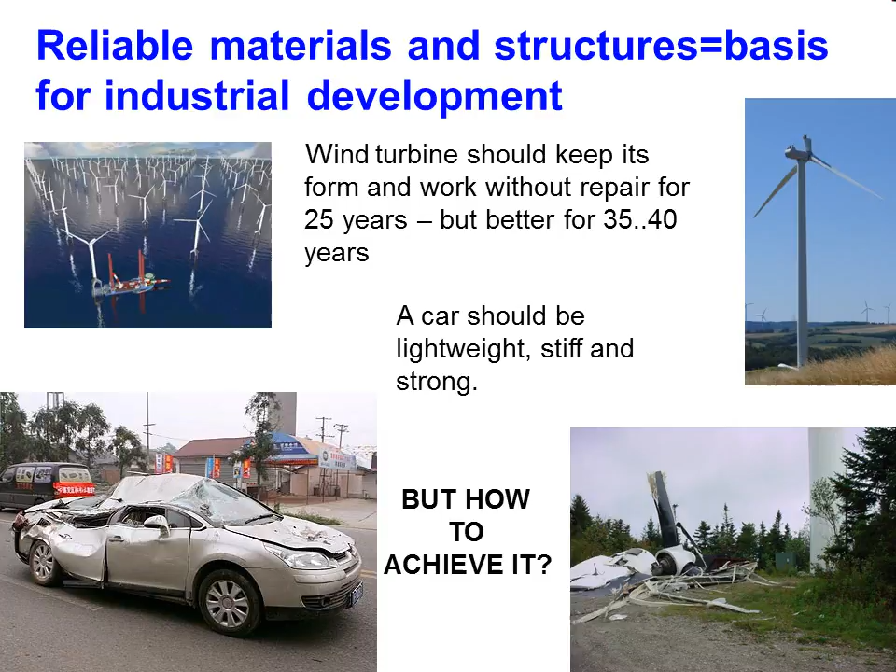Composites are on the market since the 1930s. Lord Kelvin once said that there will be no new discoveries in physics. It was 115 years ago. Are all the structural materials problems solved now? No more than problems of physics were at the time of Lord Kelvin.

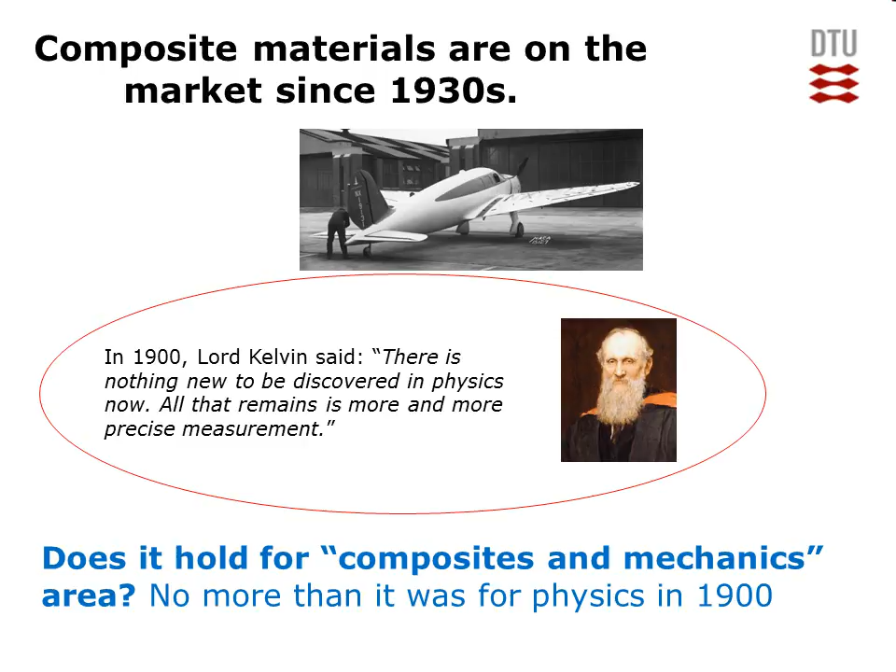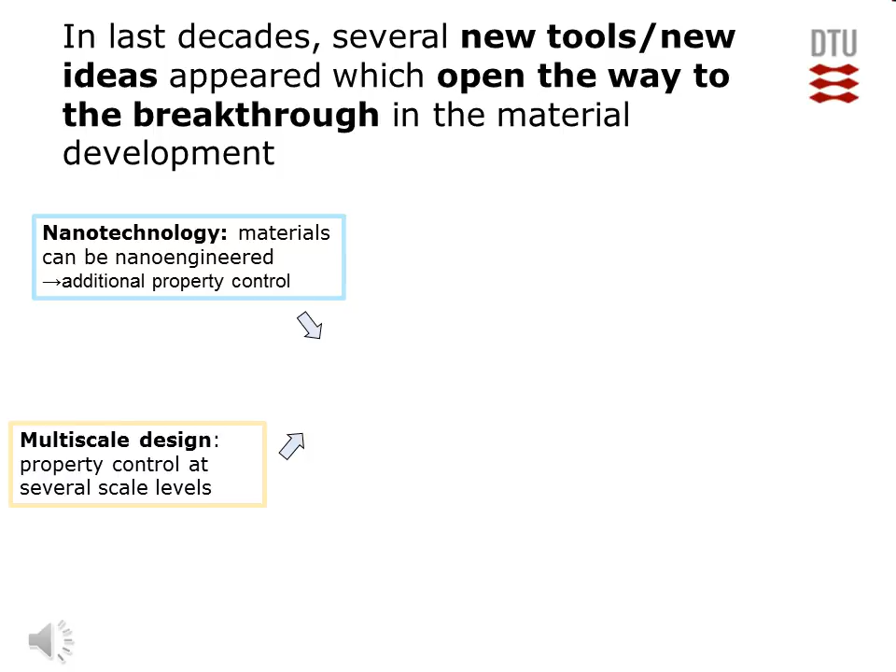Over recent years, new tools and ideas appeared, which opened the path to new generations of composites: nanotechnology, multi-scale design of materials, computational testing, biocomponents, multiphysics.

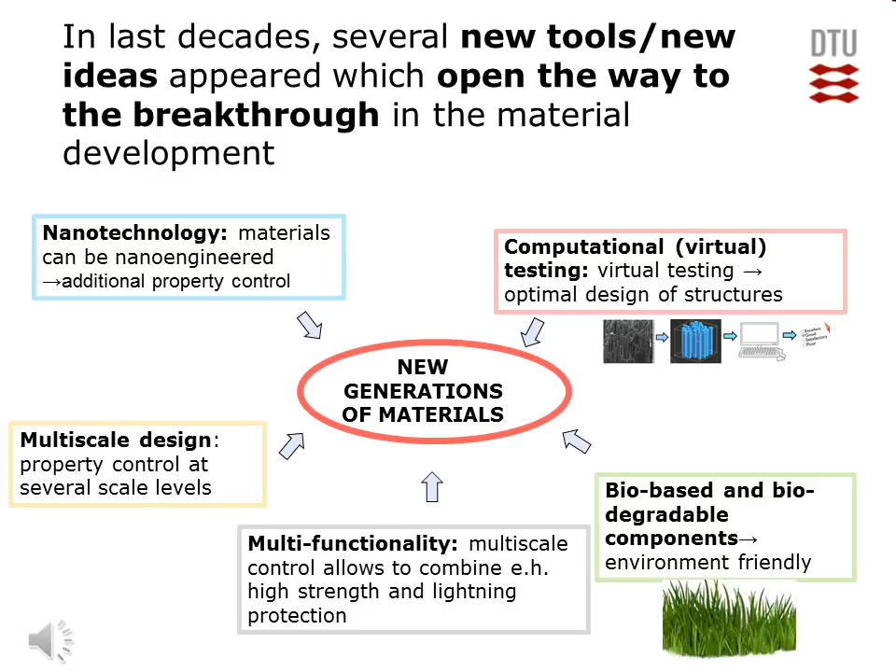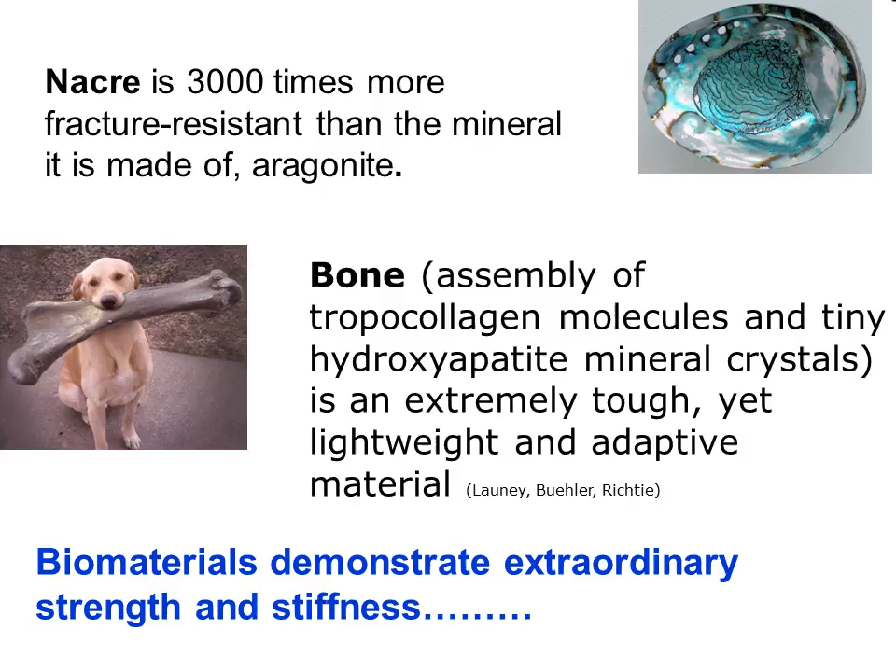Let us look around, at nature. Nacre is 3,000 times more tough than its constituent. Bones are tough, strong and light. Biomaterials have extraordinary properties.

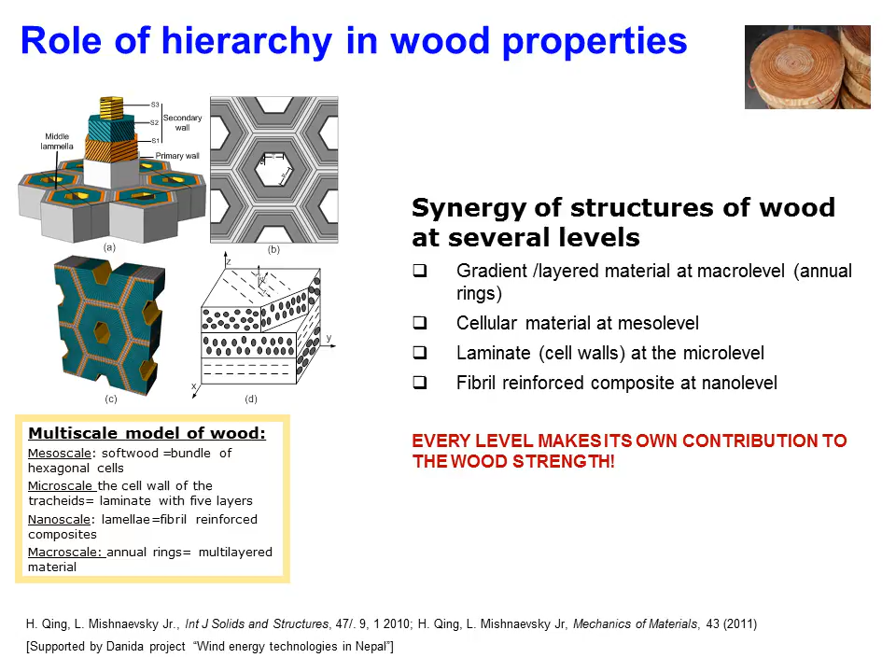Let us look more closely at the role of hierarchy in wood strength. Every scale level represents a composite, controlling different aspects of deformation and strength of wood. Can we transfer and exploit the idea of hierarchical materials in structural composites?

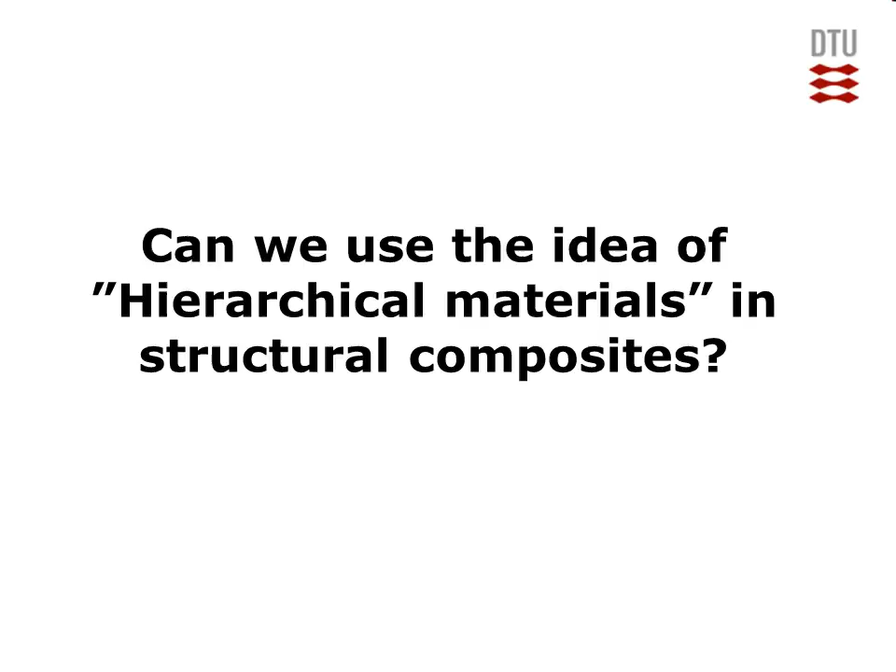Yes, we can. Adding nanoparticles into the composite enhances the fatigue resistance of the material, and adds additional functionalities, like sensing function.

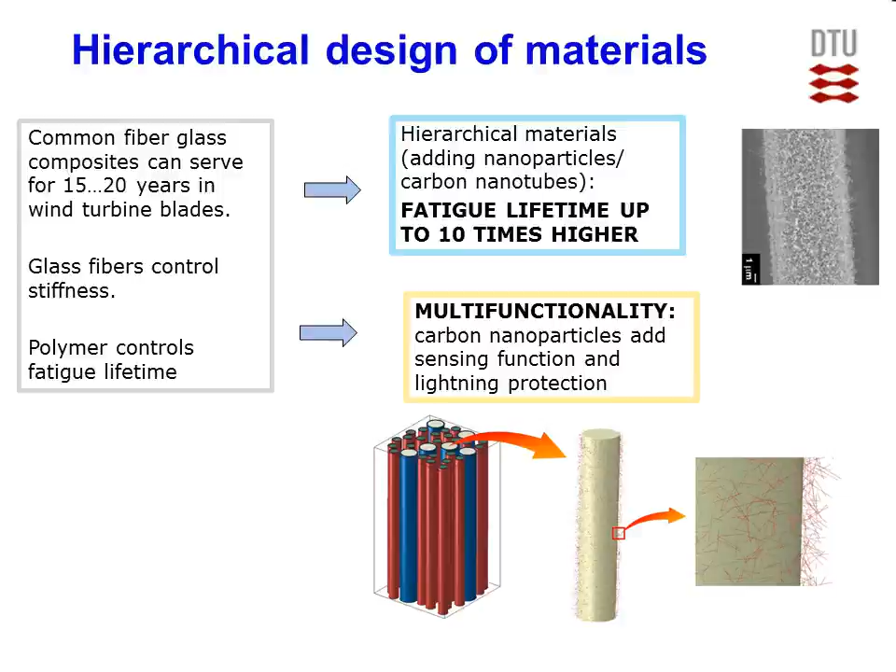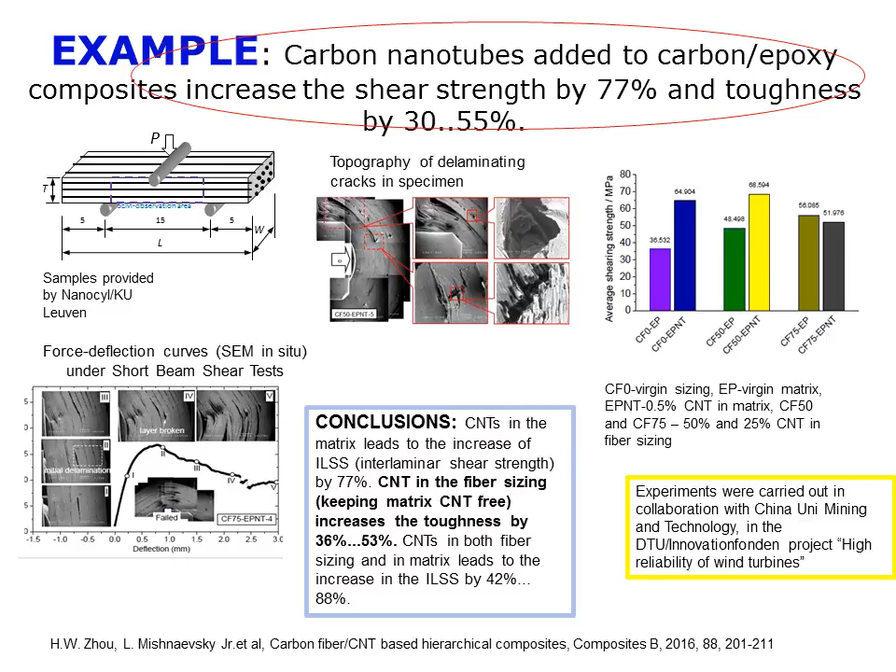For instance, we carried out experiments. Carbon nanotubes were introduced into carbon fiber epoxy laminates. We observed that the toughness increased by 50%. This work was carried out in the framework of a Danish-Chinese collaborative project.

Now, how can we choose optimal structures of materials? Can we design optimal materials?

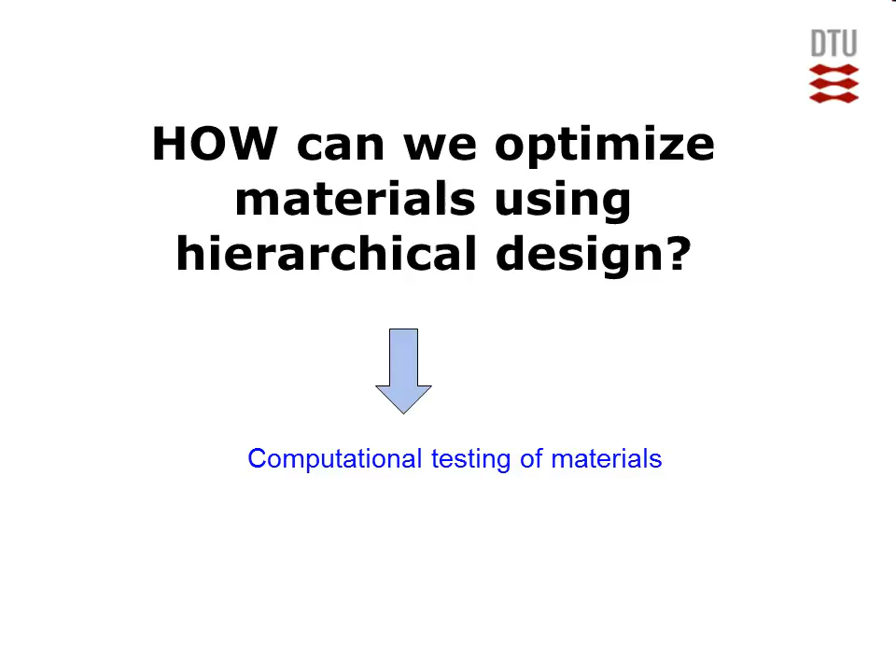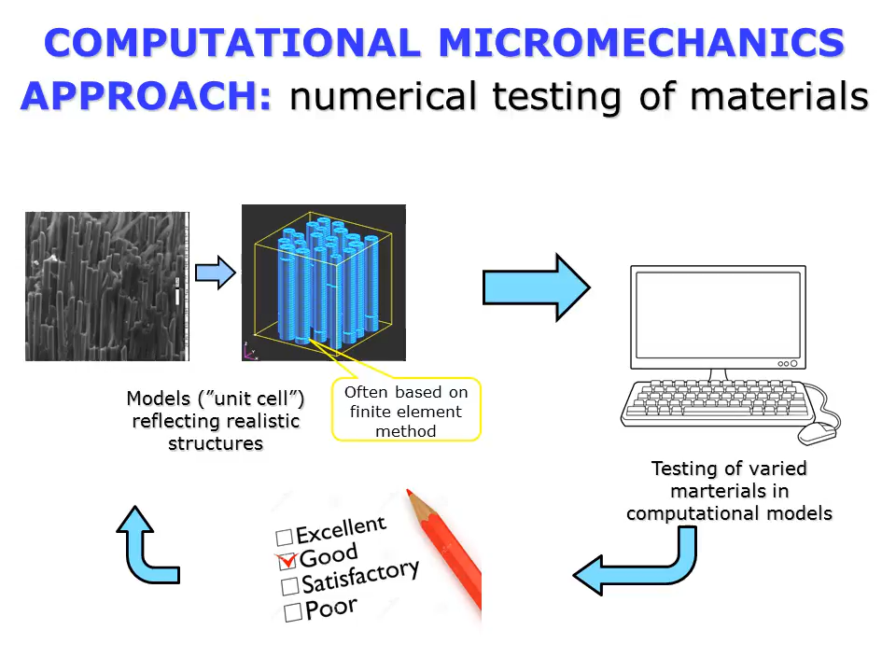We can use computational, virtual testing of materials. Taking into account real structures of the materials, one can generate computational models, using for instance finite elements, and test them in virtual experiments.

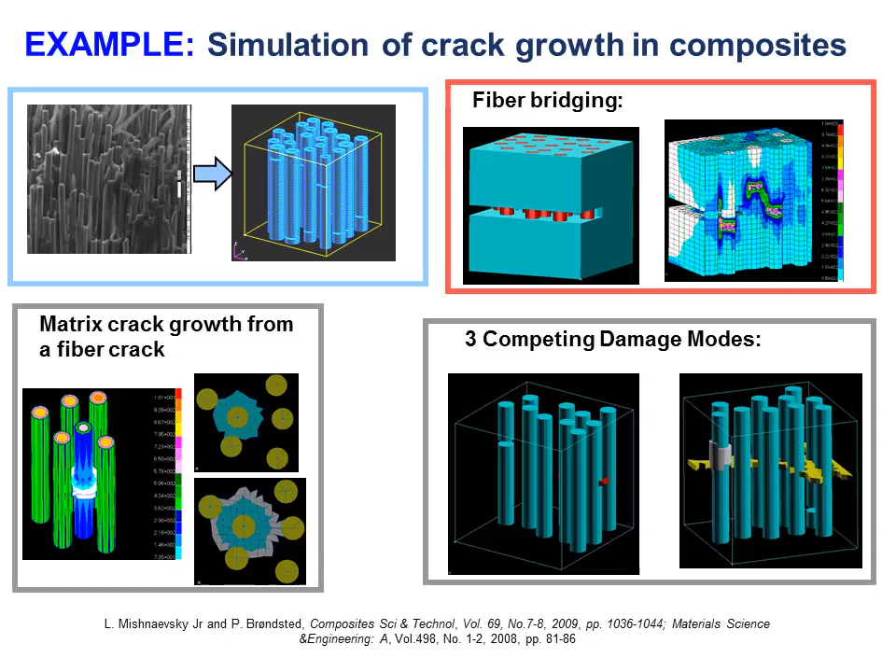Here is an example: crack growth around glass fibers in a composite, observed in the simulations. These rather simple simulations show the main features of computational testing of composites.

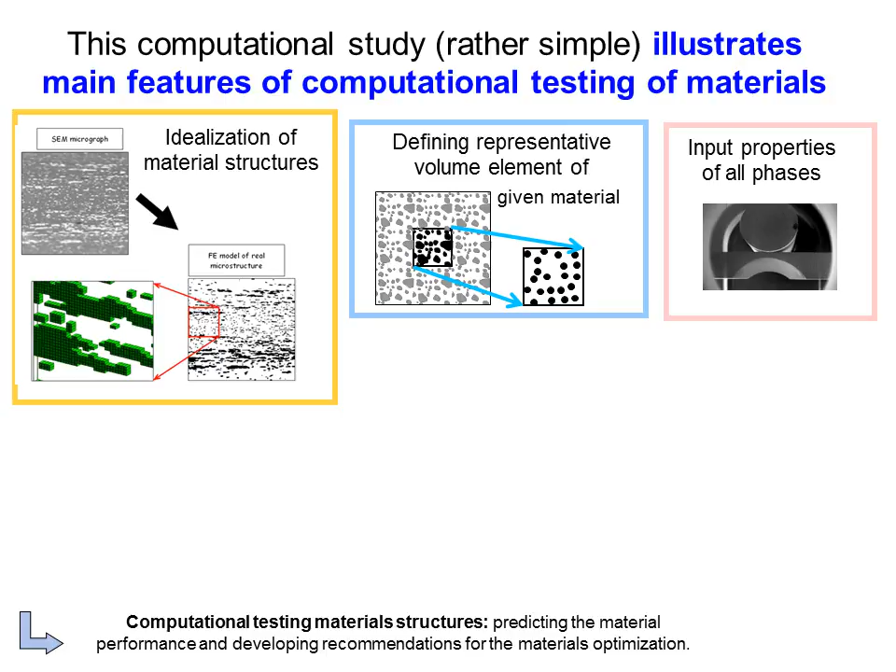It includes the analysis of typical structures, and determination of nanoscale properties, idealization and discretization of the material structures, defining the representative element of material, and dealing with nonlinear effects.

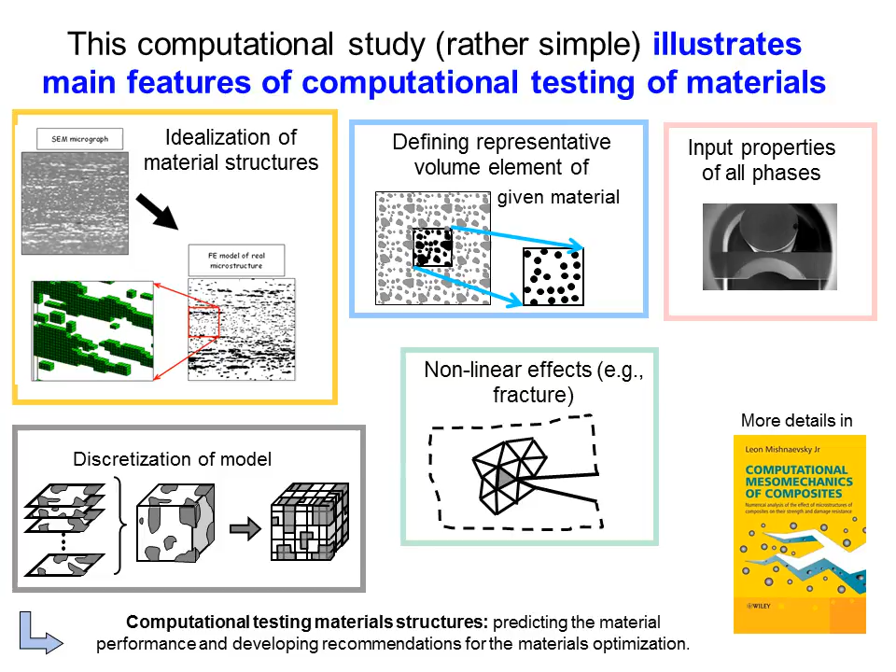Carrying out the computational testing of materials structures, one can predict the material's performance, and develop recommendations for the material's optimization.

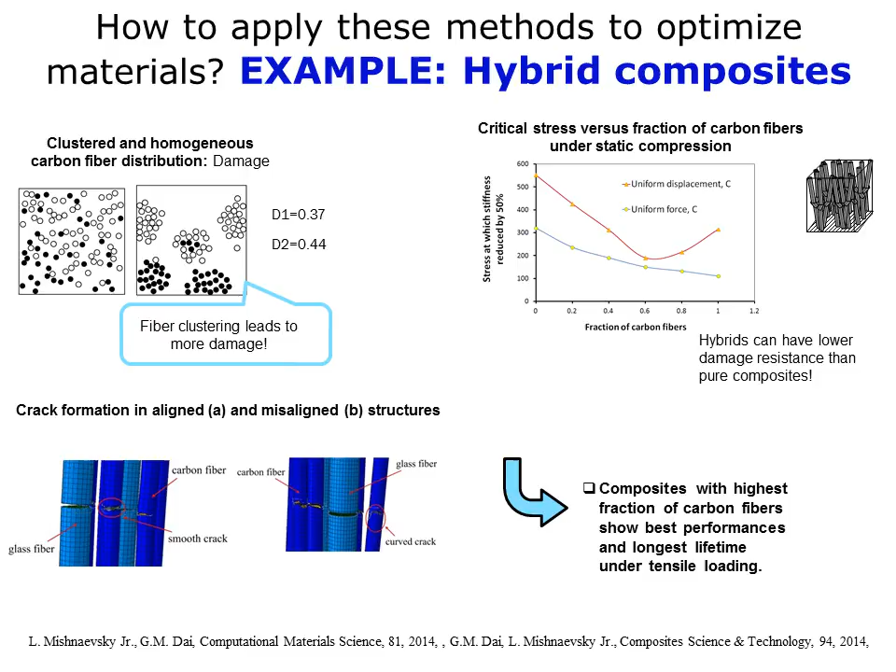These methods can be applied to the optimization of composite structures. For instance, hybrid composites with glass and carbon fibers ensure reduced weight and higher strength of wind blades. Our computational simulations allowed to predict the strength and lifetime of such composites?

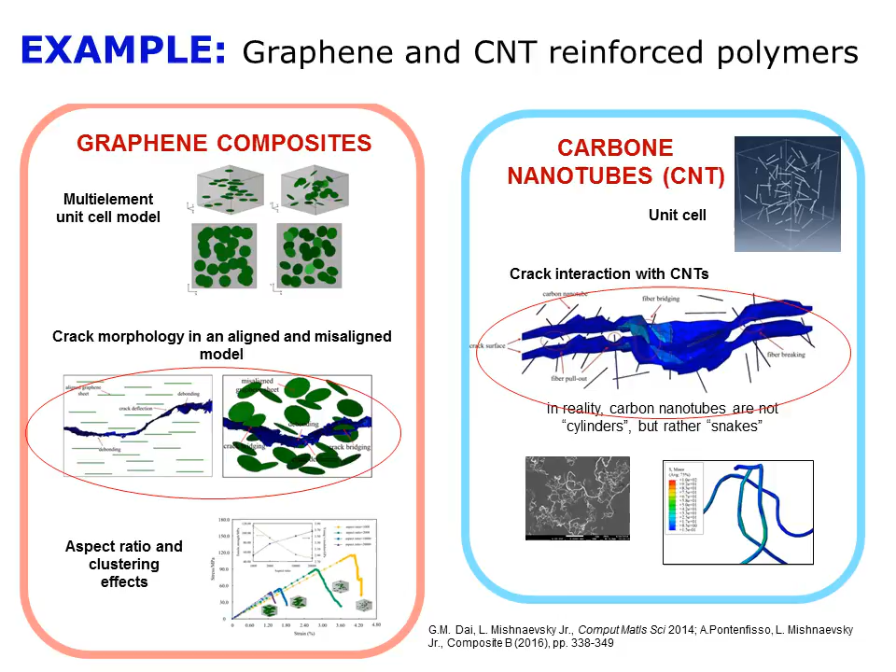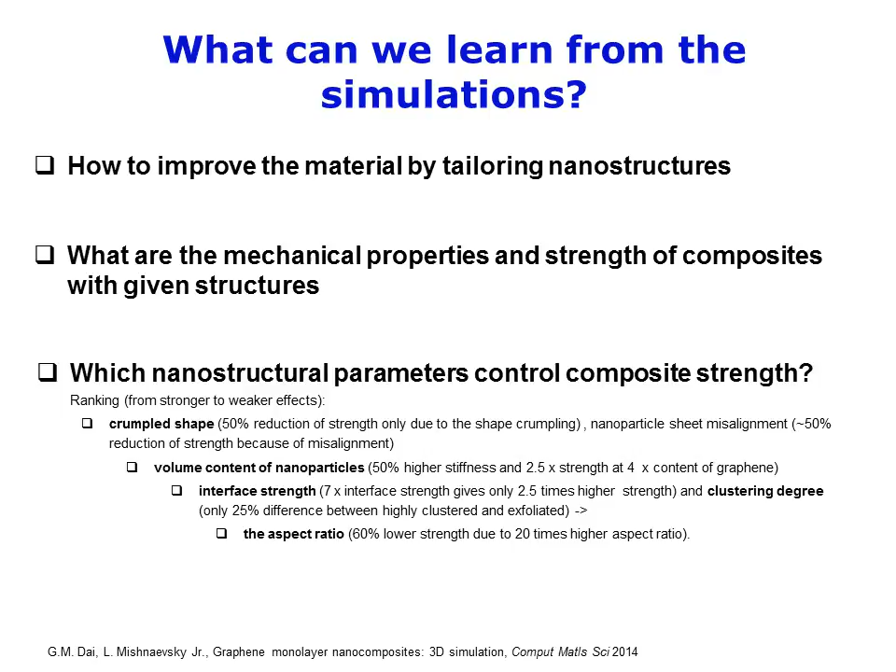What can we learn from such simulations? We can see how the material structure influences strength. We can predict performance of new materials, and find ways to optimize the materials.

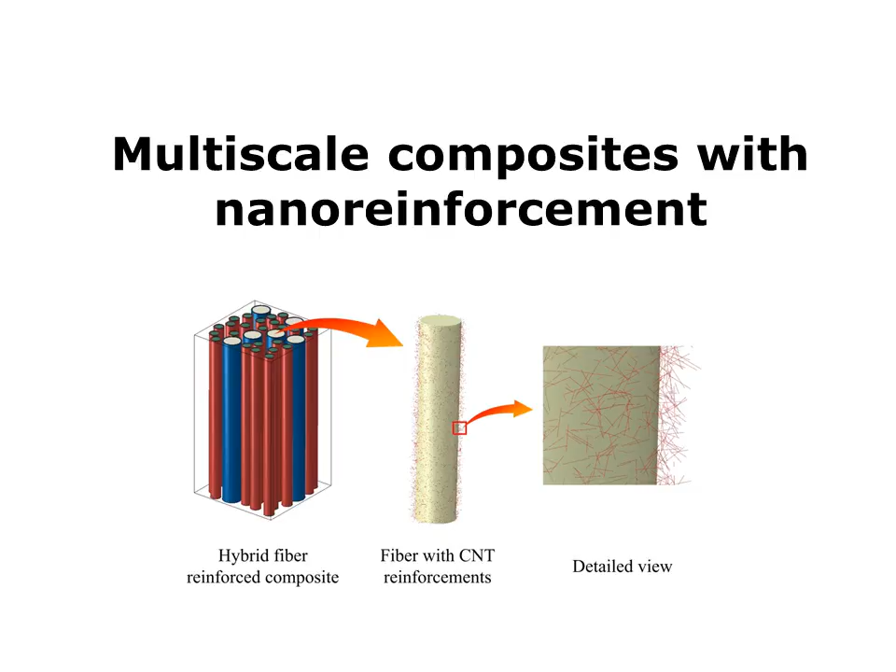For multi-scale composites, computational modeling and testing are much more challenging than they are for common materials.

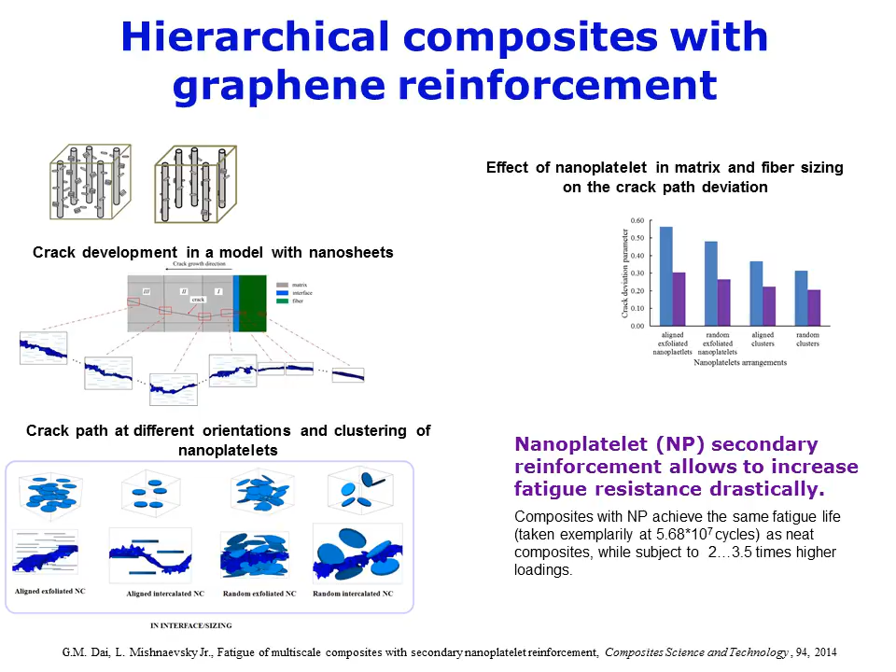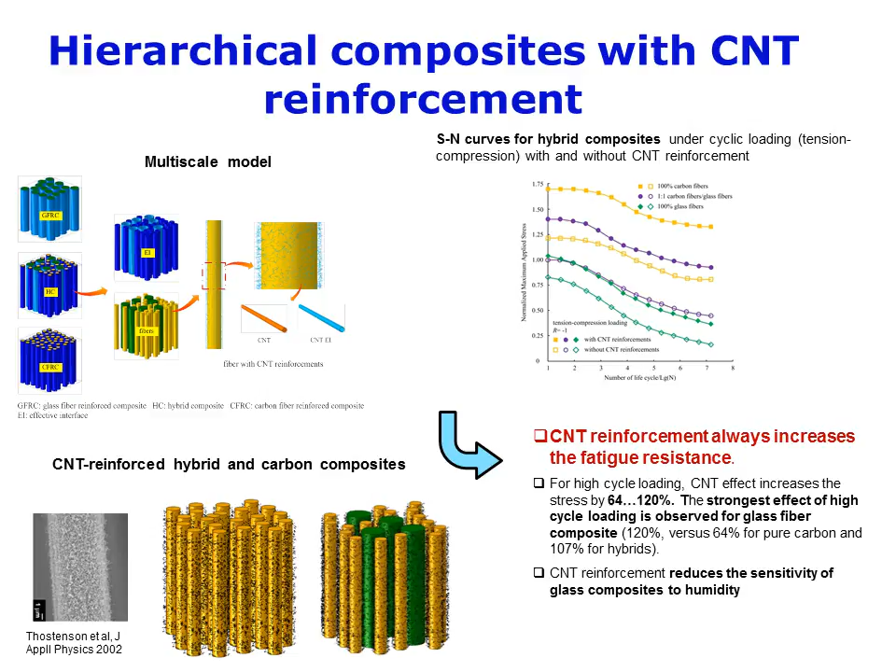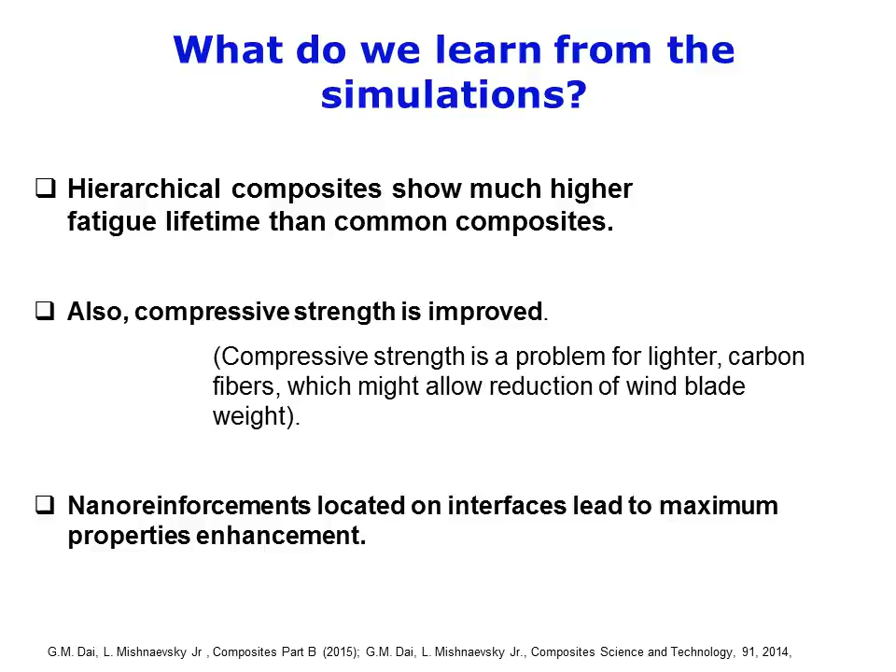Another important advantage of hierarchical composites is the multifunctionality option. Composites with introduced nanocarbon particles can be used as a sensor network, sending information about deformation and damage of materials to the user. The conductive embedded network can also be used to protect the material from icing and lightning.

Another promising direction is the development of nano-engineered coatings, for instance, for wind blade protection against leading-edge erosion.

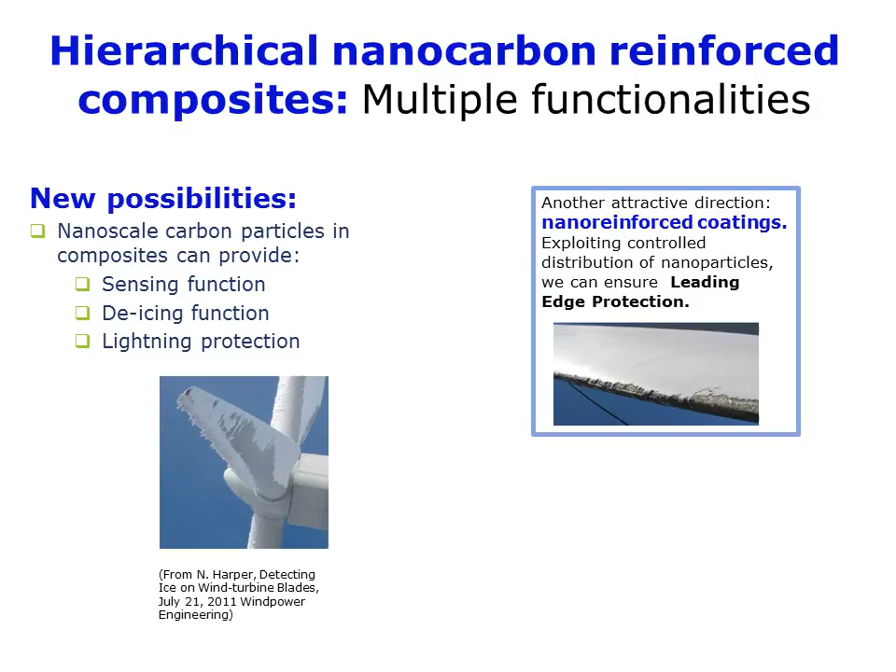But how far are hierarchical materials from practical applications? Not too far. First, natural materials. In our recent project, we demonstrated that wood, as a natural composite, can be used for small wind turbines. Our partners in Nepal built a number of such wind turbines, also in schools.

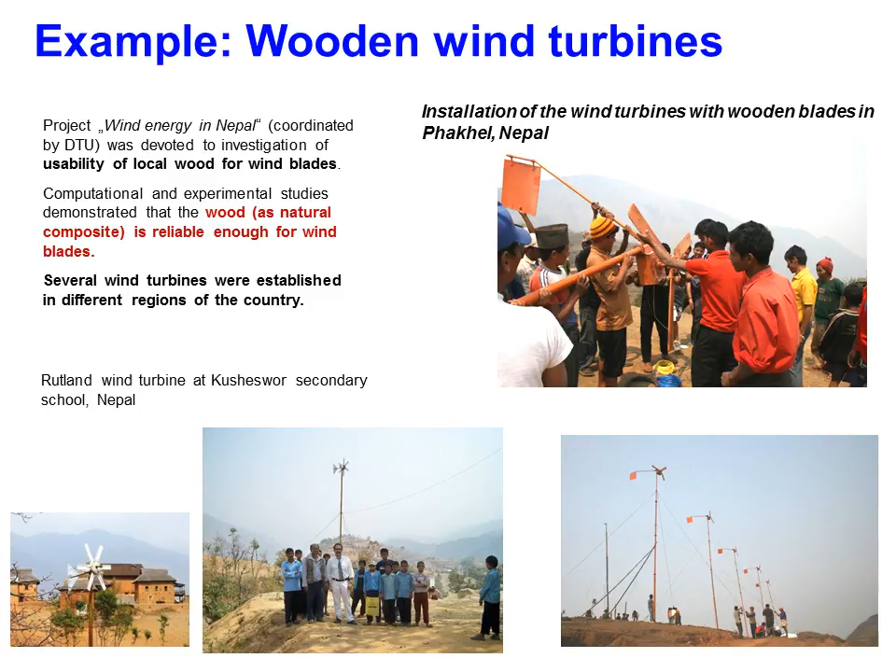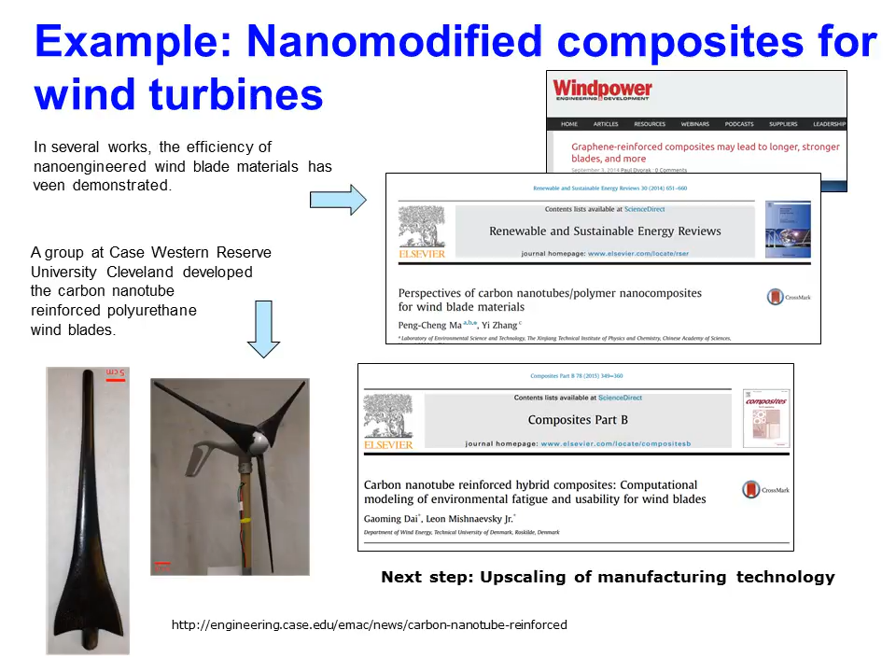In several projects, it was proven that carbon nanotube or graphene reinforced wind turbine blades are economical, and show better lifetime than common composites. A group from the Case Western Reserve University, in Cleveland, manufactured and tested carbon nanotube reinforced polyurethane wind blades.

It is worth remembering: wind turbine materials are in fact the forefront of development of structural materials.

Cars can be repaired. For wind blades, it is difficult. Airplanes can be expensive. Wind turbines must be cheap, to be competitive. Thus, new solutions for wind turbine materials lead also to new solutions for lightweight cars, airplanes, ships.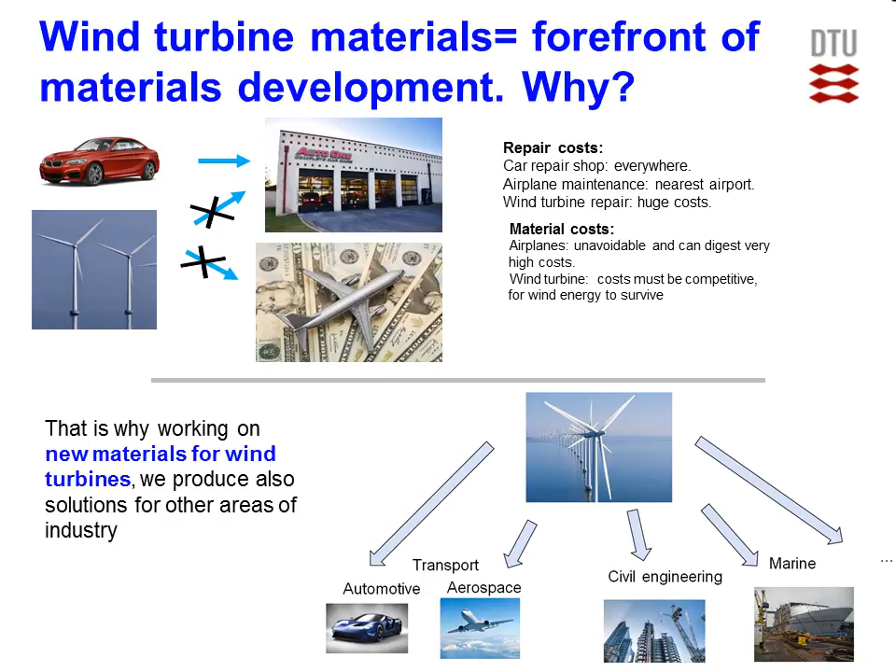Let us look at the market perspectives of composites. Both the markets for composites in general, and for wind turbine materials, are expected to show remarkable growth in the next 5 years. In Sandia Laboratory, materials are one of 4 main areas in the wind energy program. Industry needs new, better materials.

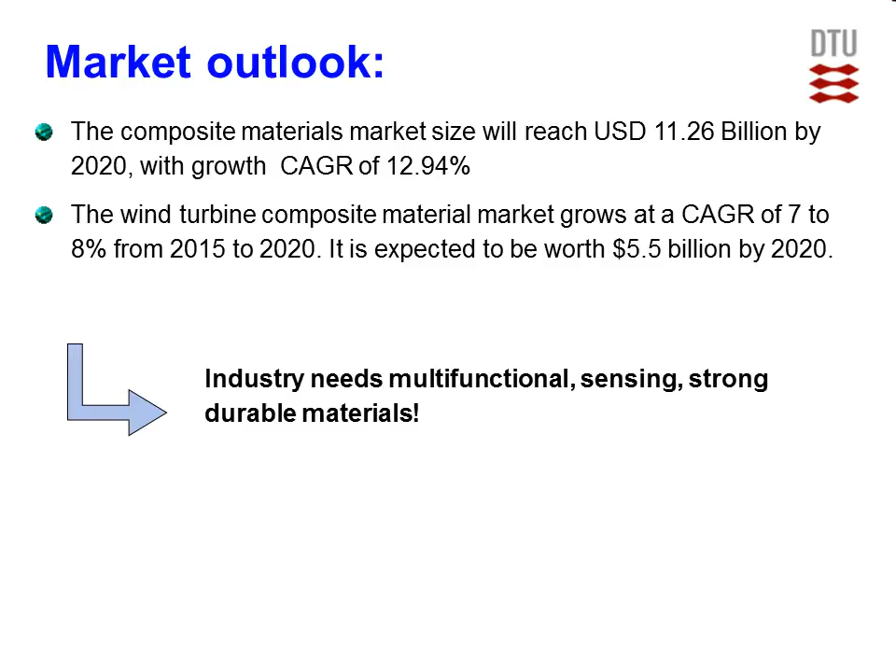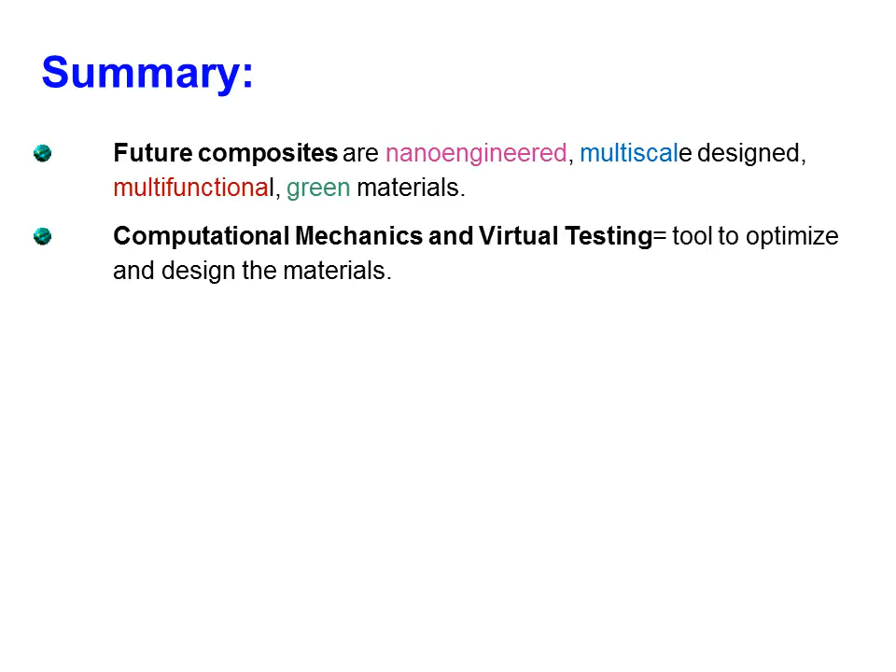Summarizing: the future of composites lies in the development of hierarchical, multifunctional, nano-engineered materials. Mechanics, first of all computational mechanics, is the tool to design and optimize the composites.